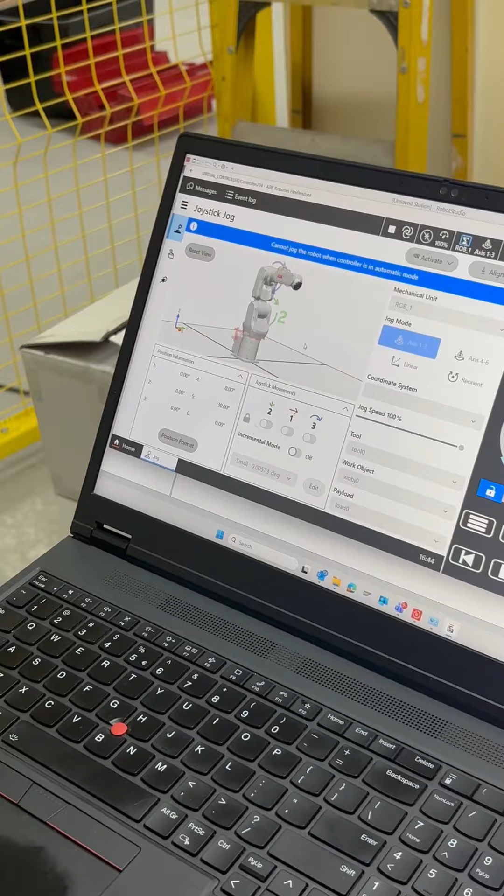What do you see? It looks identical. Exactly. Now, just look here quickly.

Now I want to move this robot. I'm just going to move this robot quickly to here. Okay, like that. Alright, you see, it's exactly the same. Exactly, that's set up there.

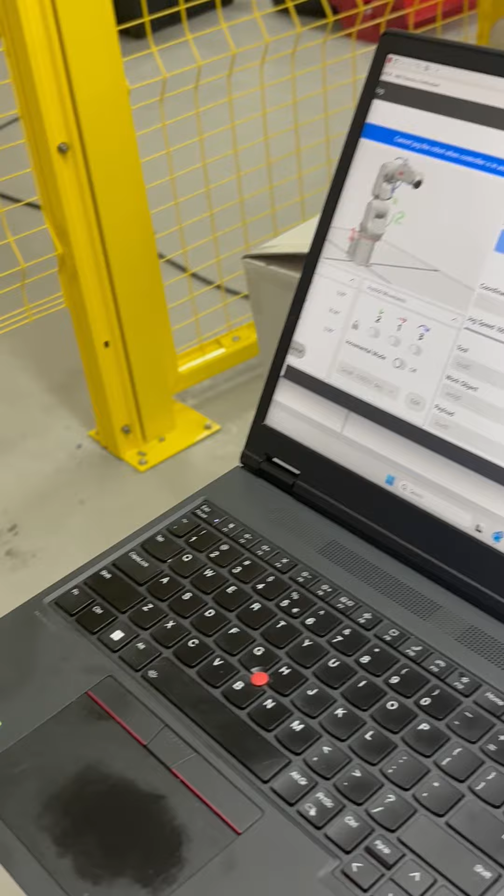Okay, now I want to move the robot. This, they call it the enabling device. Enabling device, okay. If you press this, you can move the robot. Oh, so like a jogging system, okay. Now I press it, there's my enable, I press it.

Okay, but first I must put the robot in manual mode. Oh yeah, that's a jogging mode, yeah. No, okay, now I put enable. And see now what happens.

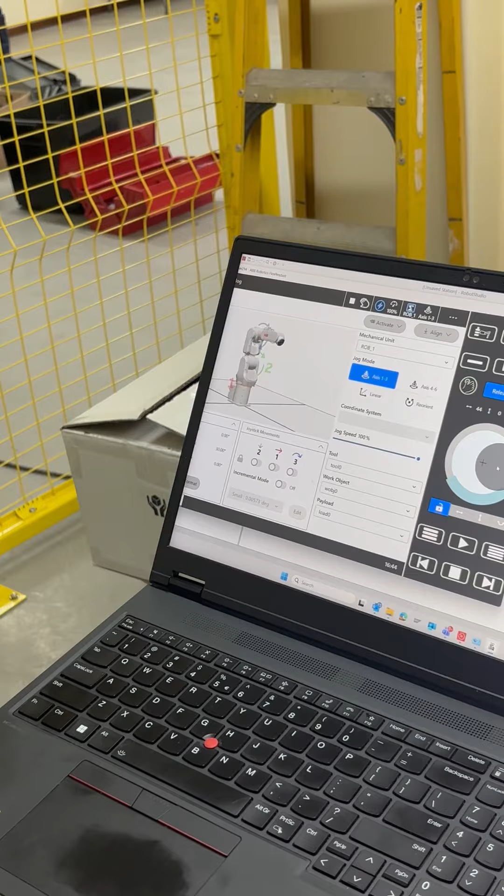I move this robot, I can move the robot. I can do everything, just like a real robot. Yes. Yeah.

I can program the robot. Yes, if you go to the programming mode, okay, you go to home, you go to job, you go in there, and now I say where the robot is now.

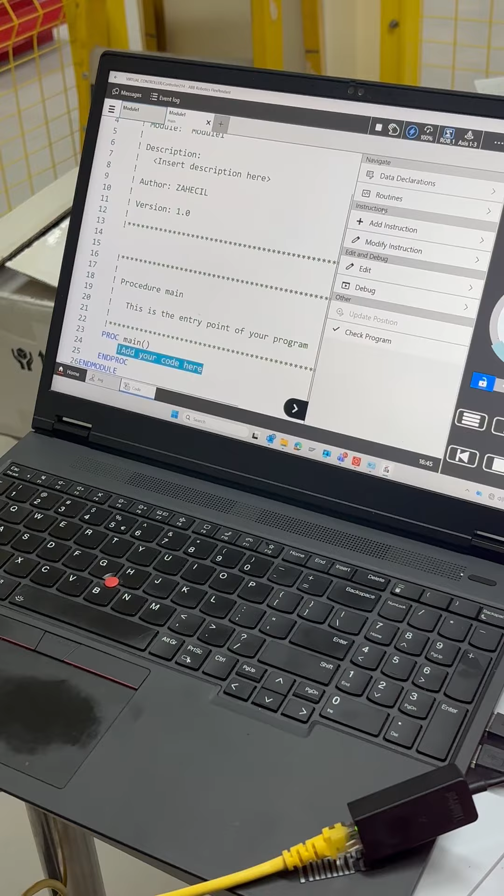I'm going to say I want that position. Now I say move J, okay, and I say add.

That is my new position where this robot is now. Okay, now I move the robot to a new position.

Okay? Yes, okay, there. Now I say, okay, I want this new position. Yeah, that's right, okay, go. I say move J, say add.

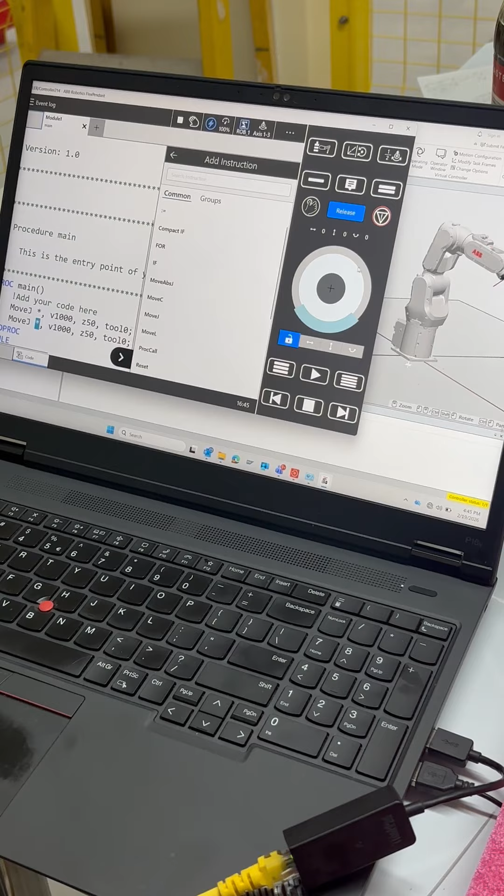Now I go to a new position. I'm turning my joystick to go down. Okay, now I say I want that position. I say move J, okay. Say add. And now I'm going to run between those three positions.

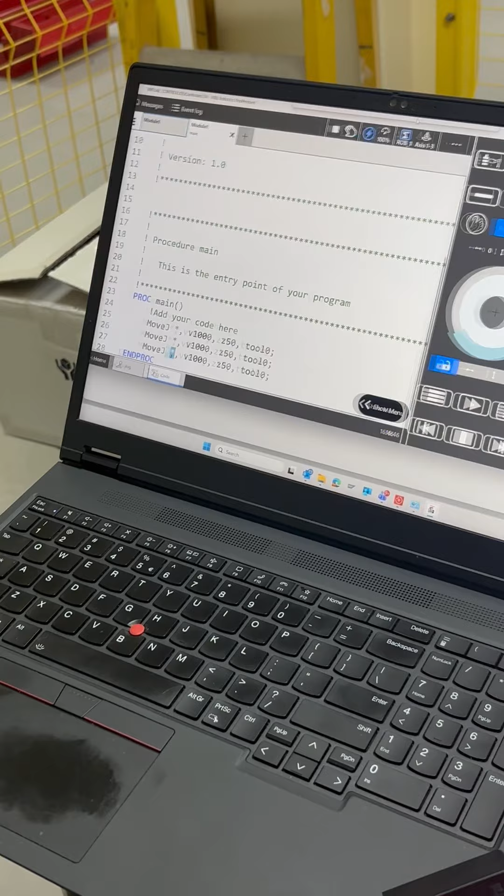Okay, and now I press play.

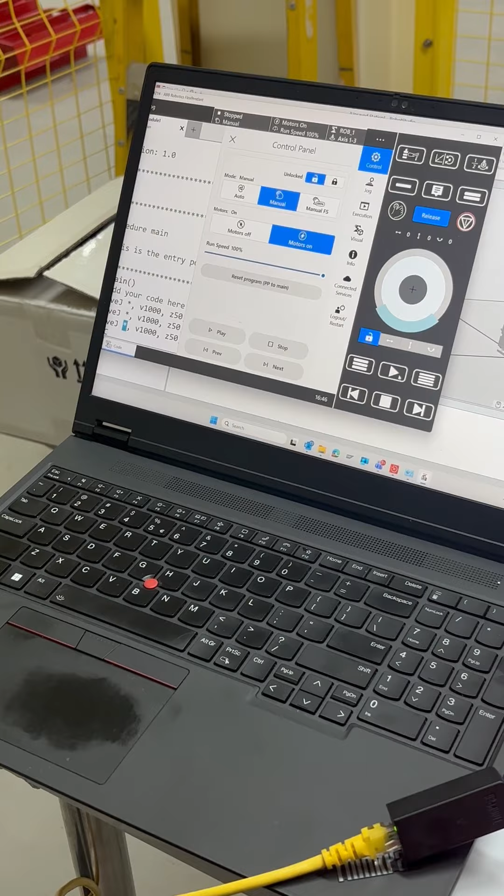You can play with those three positions.

Oh, the simulation is the best simulation I've ever seen. This is exactly what you will get. Yeah. Oh, exactly. So what you do here is what's gonna happen then.